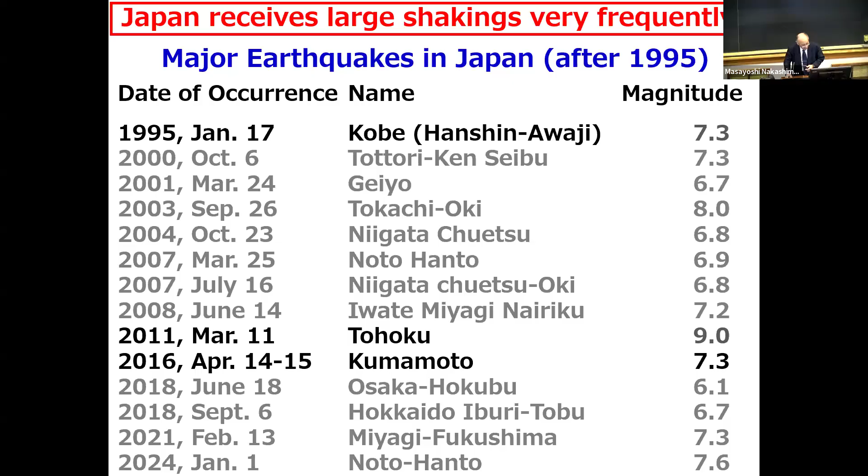One is this, 30 years ago, the 1995 Kobe earthquake, numerous structural damage we saw here. And then in 2011, 15 years later, the Tohoku earthquake occurred, and that experience invoked societal resilience as we found it not possible to protect society 100% once the big one comes.

See here, the washed away towns and villages. Unfortunately, this happened. So this way, we keep receiving earthquakes in the land of Japan. One big effort is to characterize earthquake occurrences and strong motions—in other words, how big ones come, where, and so forth.

But to this end, the country of Japan is deployed with thousands of sensors to measure the ground, and sometimes underground, and sometimes even the seabeds. Anyway, a few thousand sensors just being monitored, so forth. This is on the earthquake demand side.

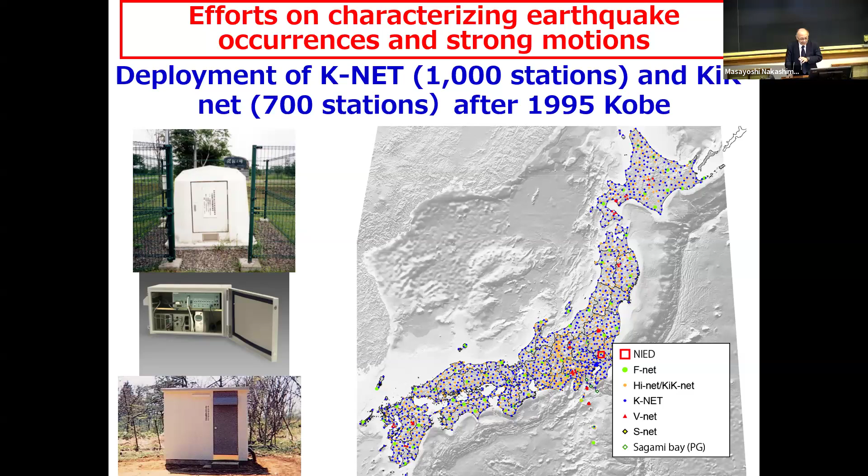On the earthquake resistance, the structure side, this is a generic strength versus vertical axis deformation relationship. So in other words, in the beginning—

No pointer, unfortunately. Okay, now here's a pointer, really small, but that's okay.

Well, anyway, all structural and civil engineers know that. First, everything is fine. But then gradually yielding begins, still all right, but somewhere damage begins, and more damage, and then to the collapse.

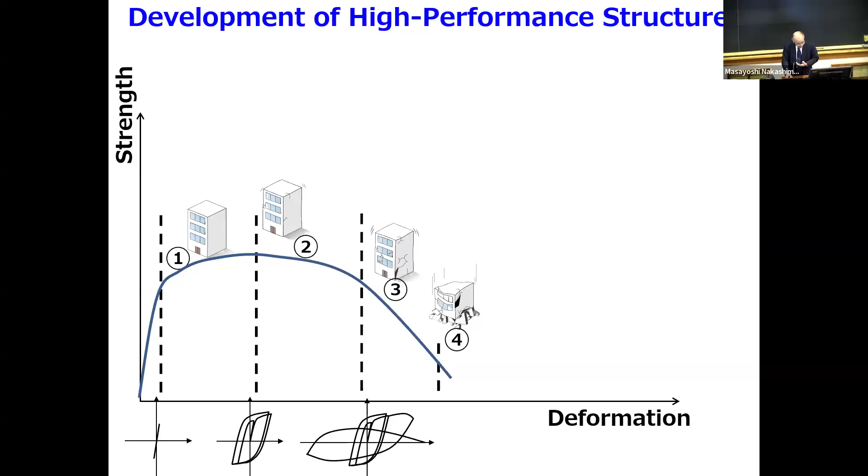That's a life, right? Then I think our effort is to increase the strength, make our structure stronger and more ductile. And there are many ways to achieve that.

For new construction, let's use new materials, or new or hybrid structures, or passive and active controls, or base isolation—those technologies to enhance the seismic capacity of our buildings.

And for existing structures, the advanced diagnosis methods for seismic capacity and according retrofits and so forth. Anyway, the efforts continue to raise the strength and the ductility and so forth. So that's Japan, and we can't escape this.

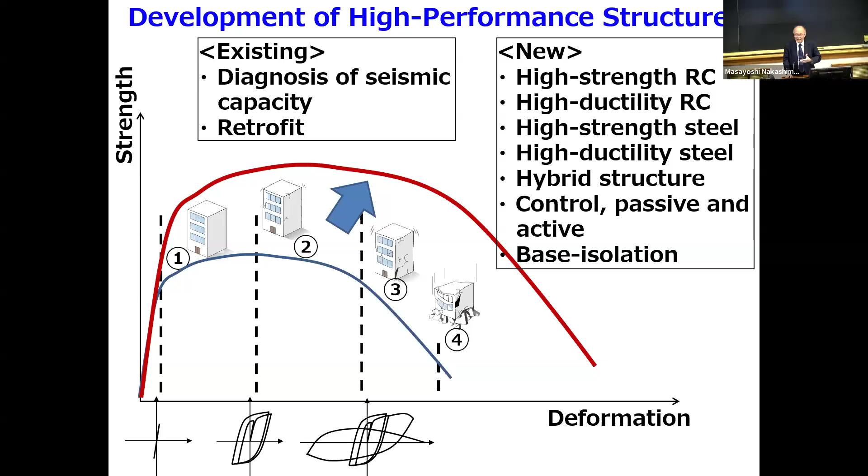And now here is a little bit about myself. Professor Ricles already gave enough introduction, so I can almost skip this.

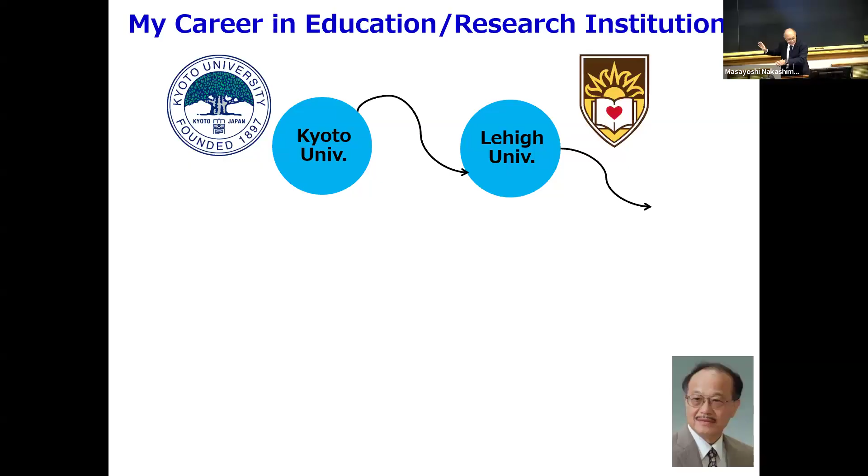First, I graduated from Kyoto University and came to Lehigh, happy four years, then returning to Japan, I joined the national research institution called the BRI, Building Research Institute, moved to Kobe University and Kyoto University, and time by time I worked for the Cabinet Office of Japan to lead some national research.

But sometimes, as indicated by Professor Ricles, I worked for E-Defense, a big jumbo shake table, whose details I'll talk to you about in a moment. But anyway—

Pictures of three gentlemen. Minoru Wakabayashi, my mentor in Kyoto, was a visiting scholar at Lehigh in 1955, long before you were born. But anyway, the person in the middle is Professor Bruno Thürlimann.

He was professor at ETH Zurich for many years. He was also at Lehigh, right? Professor there one time. And the last one on the right is Professor Le-Wu Lu.

He was professor of this university until 2015 or so. Those three gentlemen were friends, and their friendships somehow brought me to this happy place of Bethlehem, Pennsylvania.

Well, in the interest of time, I'll skip the details, but there are funny stories somewhere. Anyway, thanks to those gentlemen, I was able to come and enjoy myself when I was in my 20s. Back to this, the issue of today.

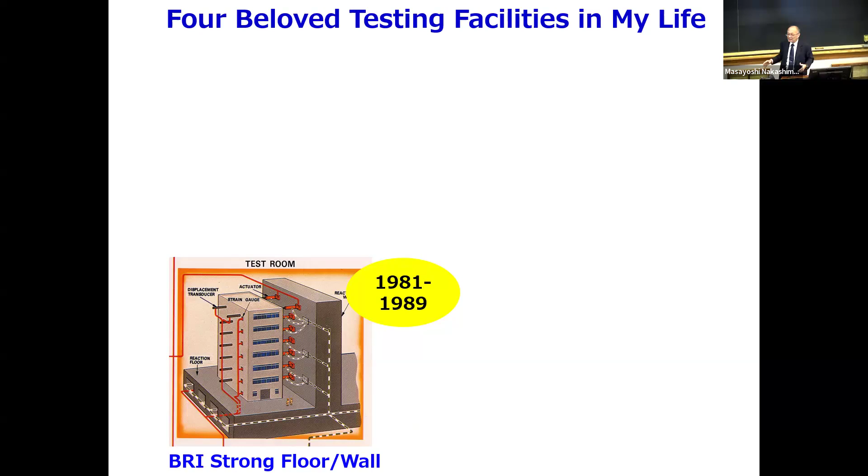I had a happy time there, but then 10 years later I moved to Kyoto University, where I worked for the management and operation of a medium to small size reaction wall, much shorter and also narrower.

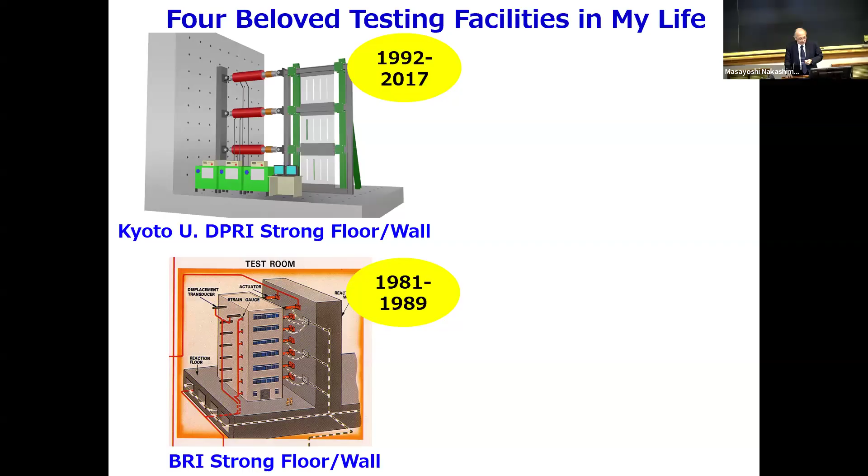But anyway, so I joined Kyoto University and was engaged in experimental work using small size loading systems. A few years later, in conjunction with post-Kobe research, my university got some funding to develop a medium-sized shaking table.

And then at that time, the Kobe earthquake caused much damage, and one reason was the large velocity involved.

So therefore, the post-Kobe research facility development naturally needed to produce that large velocity. But anyway, I got engaged in dynamic testing at small size.

And then about 10 years later, I was asked to join E-Defense to found and operate this big jumbo facility—again, dynamic testing. So those are the four labs I spent my life in as a professional.

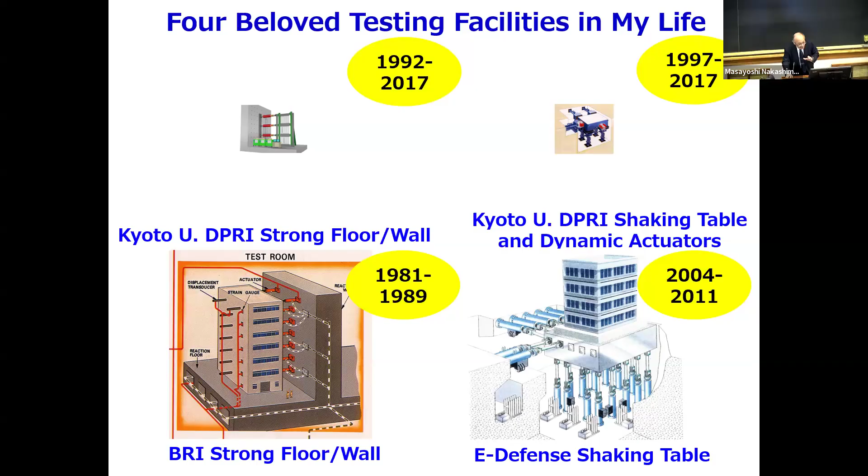However, these pictures are a little misleading because the reality must be like this—much smaller. So then it's small, big, big. Okay, and further, this picture gives us an interesting classification. First, those two are small.

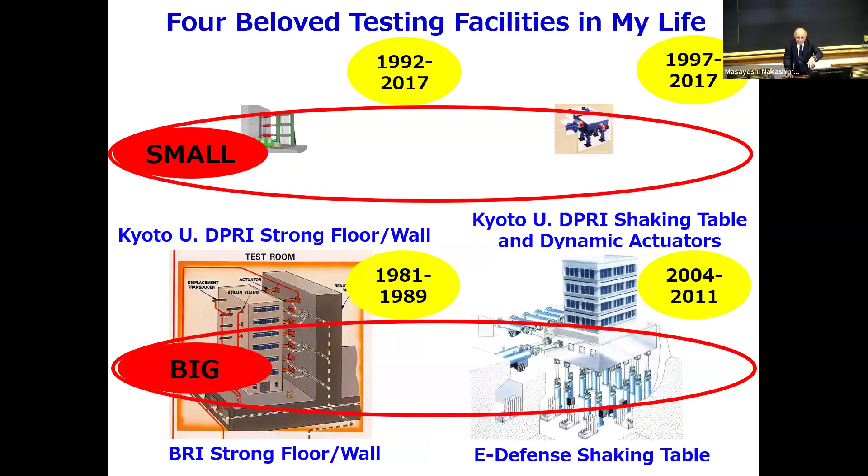Those two, big size. Now, not only that, look at the vertical axis, slow. Actuation means applying the loads and so forth, slow, versus this one, real time, bam, bam, bam, fast. So here it's an interesting combination of slow versus fast, small versus big, a total of 4 combinations, right?

I was involved in all of those 4, and I got some special experience with those 4 facilities. That experience of mine is something that is a story that I would like to share with you today. So far, big versus small and fast versus slow. Small versus fast. Now let's go with the big one, slow.

This is a jumbo testing facility at Building Research Institute. One thing I want to emphasize is that this was not built yesterday. 1980 means 45 years ago. 25 high reaction wall and 25 by 20, well, number not important, big anyway. So then floors, and then the test bed can accommodate 6, 7, 8 stories of buildings, real scale, and then many actuators attached and push and pull, and then see how they behave and so forth.

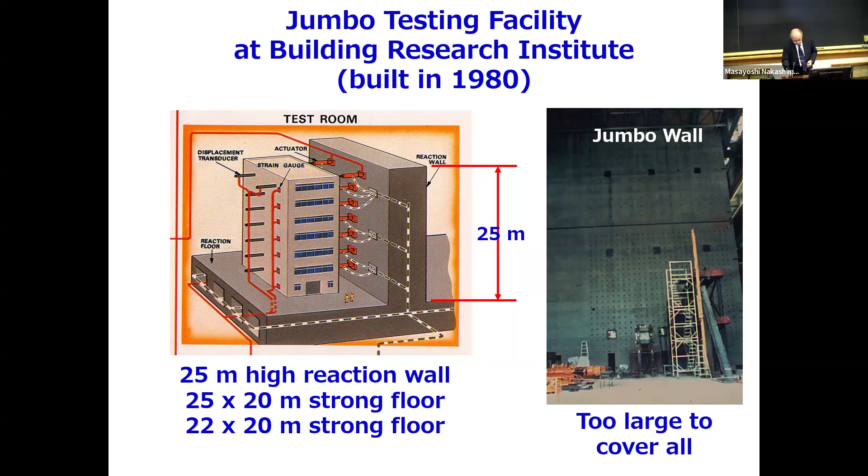Now this is a loading and measuring system. Too small in characters, but anyway, many wiring permanent to connect the sensors to the loading, to the data processing system, hydraulic power here, and then servo control, and also the computers to control servo control and the measuring and so forth. And then this is the system made available 45 years ago.

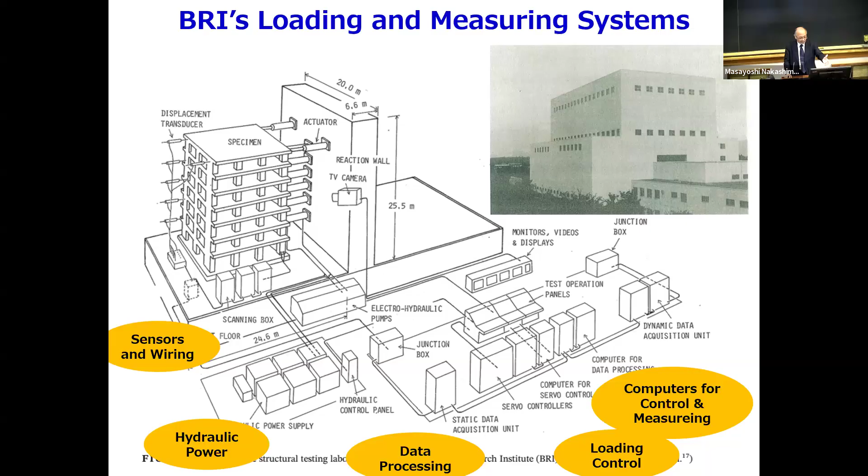And I worked as the most junior member of this. And then we're trying to incorporate the then relatively new technique called pseudo-dynamic test, or also known as online computer control method, now called hybrid simulation. We were trying to deploy the method of hybrid simulation into this big system.

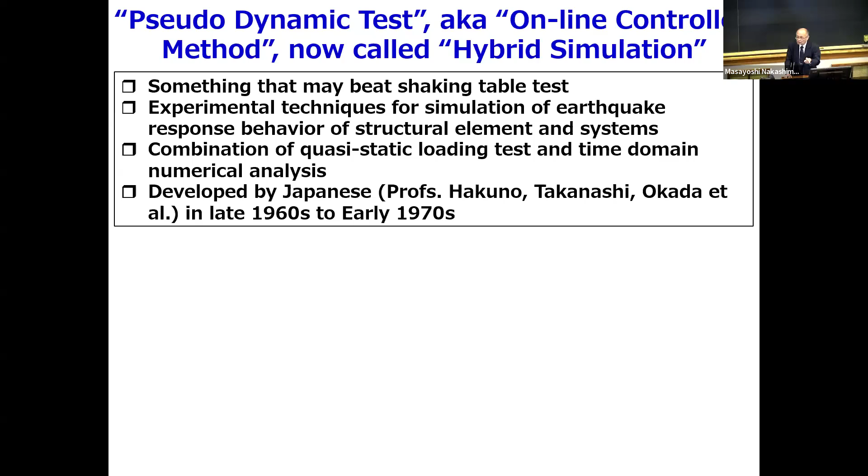And what is hybrid simulation? This is something that may beat shake table tests. It's an experimental technique for simulation of earthquake response behavior of structures, elements, and systems, or a combination of quasi-static loading tests and time domain numerical analysis. Interestingly, the method was developed by a group of Japanese over here, with the initial development in the late 1960s and early 70s. And this is a picture of the hybrid simulation.

I know that many of you, particularly those working for ATLSS Center, are very familiar with this, and know better than I know. But nevertheless, let me briefly explain what it is using my old language. Suppose we have a three-story building whose response under earthquake we want to know. If it is an elastic system, that's easy—there are simple numerical or analytic solutions available.

But if it exhibits strong nonlinear behavior beyond yielding, like this, then it is rather difficult to model such hysteretic behavior. So the idea was, let the test attached to the equations of motion solve the hysteretic behavior. How? We set up the basic equations of motion to represent this system, then use direct integration with respect to time. Suppose we are at step n, we predict the displacement for the next step, apply the displacement to that target, and when we attain that displacement, we measure the reaction forces F.

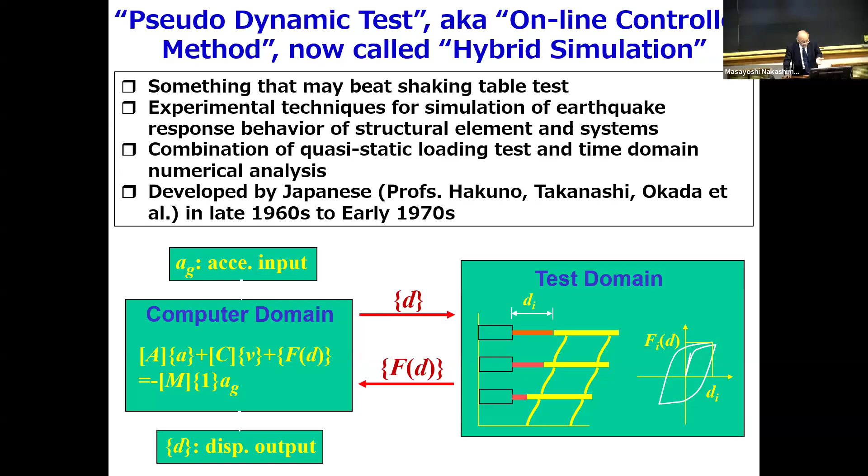This was one of the actuators that can produce 1 meter of stroke, plus minus, with high resolution digital displacement transducers, and then many sensors to measure local behavior and so forth.

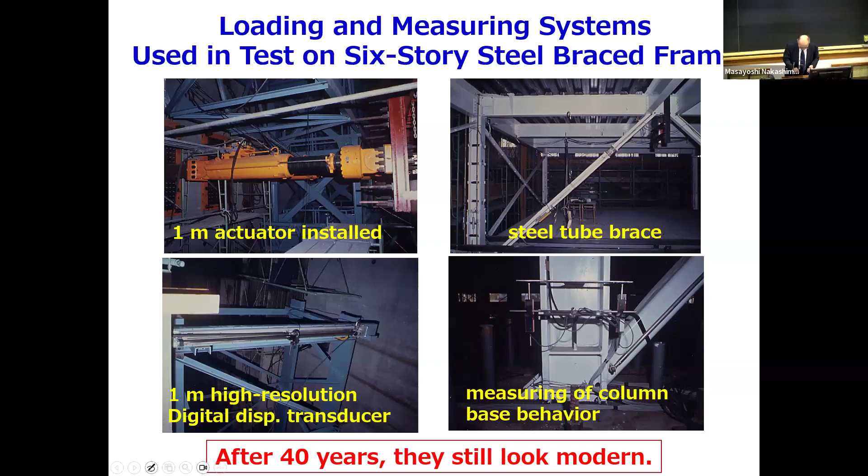As I said at the bottom, after 40 years, they still look sort of modern, so not so bad. But that's something that I was engaged in.

One notable thing is it took 5 working days instead of 10 seconds. Why? Because intentionally the speed was slowed down. More important, when we reached a certain displacement at the peak, we stopped, paused the loading, held the displacement, and then the engineers went into the specimen to check damage and so forth. So it takes an awfully long time. In the end, in order to simulate the 10 seconds of ground motion, it took 5 days, but never mind, 5 days is short enough. But this is the system that I worked on many years ago, and again, it's a big but slow loading system.

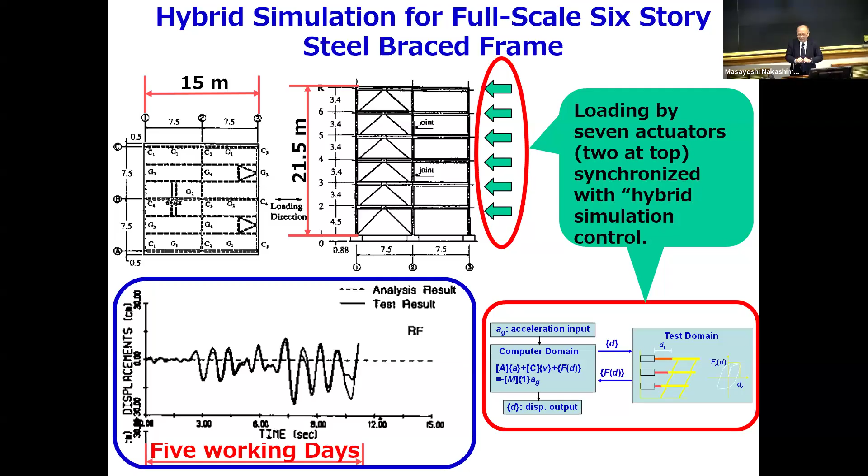Next, 10 years later, I moved from this big institution to a university, and I was able to get this system, already old, but instead of 25 meters, now 5 meters, and instead of 20 by 15. Long enough, but still. The laboratory was not equipped with servo actuators or computer-controlled actuators, none available. So no way to do hybrid simulation, but that's not true.

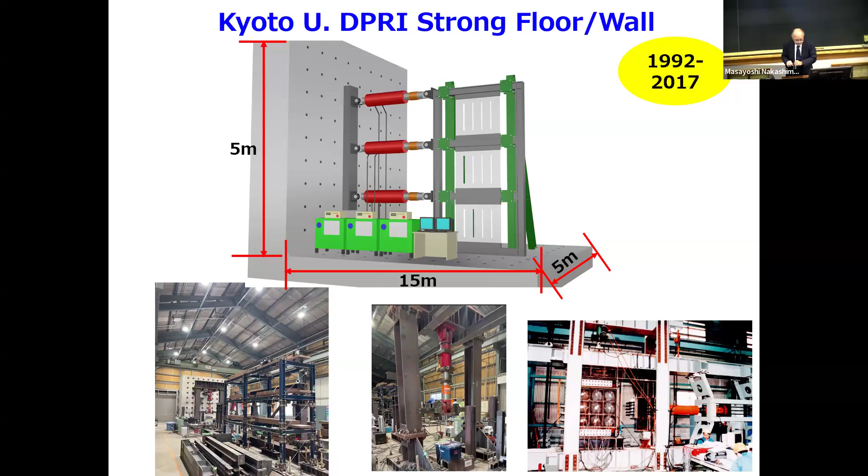Necessity is the mother of invention. Using the most conventional devices, almost available anywhere in the structural lab, we were able to do hybrid simulation.

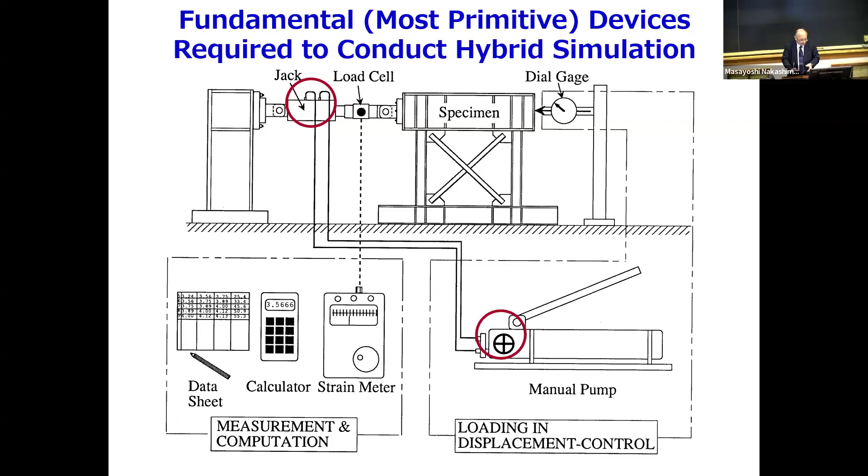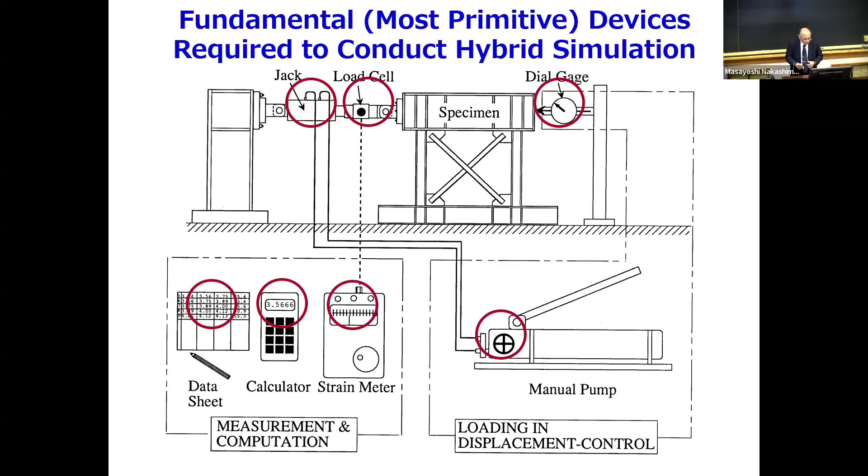In which way? Like this. First we use a very conventional jack, probably everyone knows it, using manual pumps, push and pull. Then a load cell with strain meters to measure the reaction forces. And a dial gauge, measured by human eyes, then a data sheet and calculator, and of course a pencil needed. This is before PCs, once again. So these are the right components we needed to do the most primitive hybrid simulation.

Now, extending this, I made up a story of Jack and Meg. The story is as follows: how using such primitive devices we can do hybrid simulation.

First, two persons, Meg and Jack. Meg is in charge of measuring and calculation, and Jack is in charge of applying forces. First, Meg tells Jack so-and-so centimeters for the next step. Then Jack starts pumping, monitoring the dial gauge to see how it moves and to get to the right displacement. Jack stops pumping and yells to Meg to measure. Then Meg reads the signal, writes it down on the sheet, and hits the buttons of the calculator to solve the equations of motion. By repeating this, we are able to do hybrid simulation.

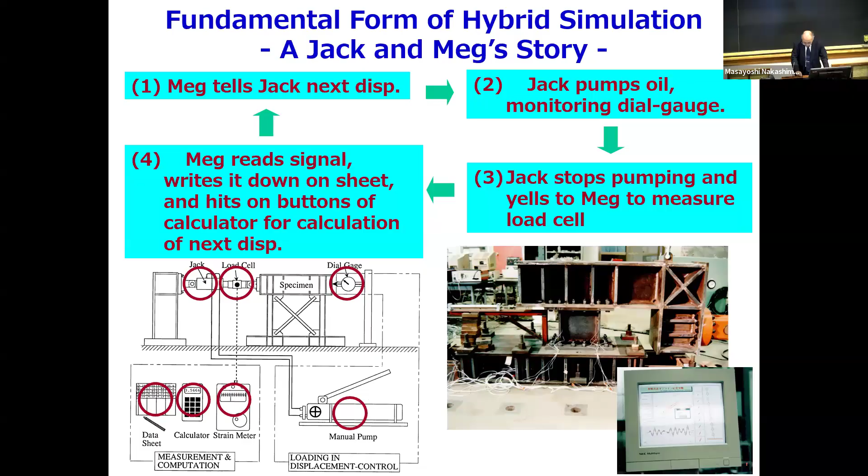Of course, not real time, but this way. Now, some of you may be skeptical about it, but that's real, it was not a joke. We wrote a journal paper in which Jack and Meg's story was presented explicitly. It was published in Earthquake Engineering and Structural Dynamics, a pretty high impact factor journal. And this was not yesterday, it was in 1995, 30 years ago.

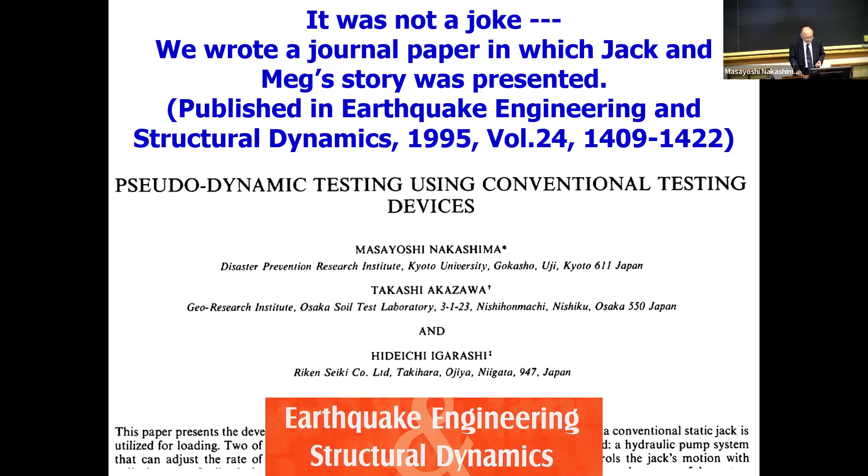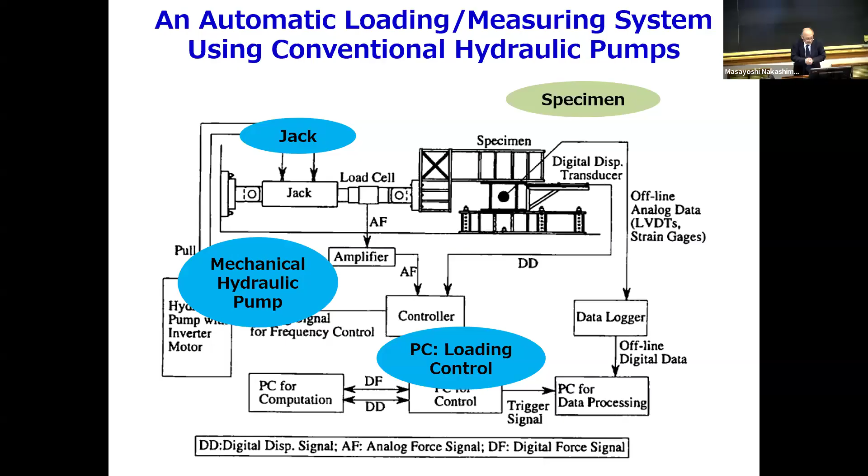So this is what we did. And of course, the complete manual operation was replaced by some sort of automation using 1990s technologies, such as instead of a manual pump, using a mechanical hydraulic pump controlled by PC, and measurement similarly using a data logger or PCs to store the data, and introducing another computer to solve the equations of motion. So, inheriting the spirit of manual operation, we did it.

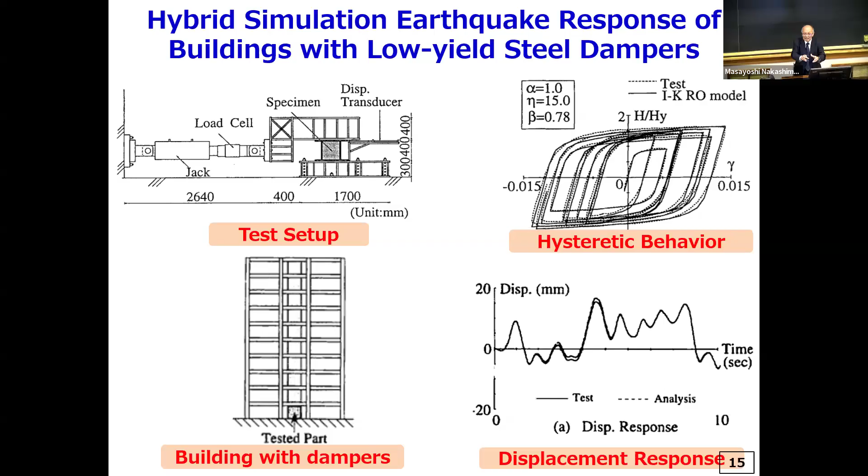Using this, we tried to simulate the earthquake response behavior of a 10-story structure with hysteretic dampers embedded. Those show some of the scenes, and the right bottom shows the displacement history and so forth. We came up with beautiful results. Of course, in essence, there are many dark sides of the story, many millions of mistakes and others, but today I only show the bright side. Anyway, this way it's possible to do hybrid simulation testing without an electronic sub-actuator system. That was what I did when I switched from a big one to a small one.

Then it came to the shake table. Our university got some funding to develop a 3 by 5 meter 3D shake table, characterized by 1.5 meters per second velocity, a big, medium-sized shake table. At the same time, we also got dynamic actuators capable of applying relatively large velocities.

You remember after Kobe, there was big damage. I think the large velocity was considered to be the source that really aggravated that degree of damage in Kobe. But anyway, now from slow to fast.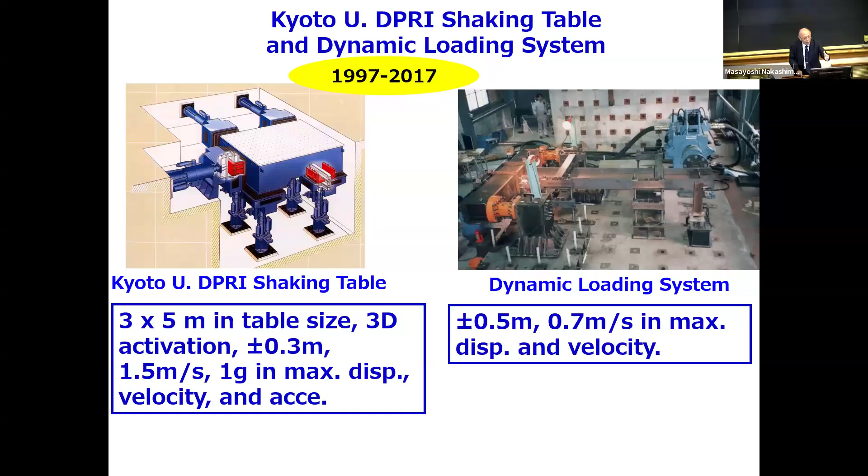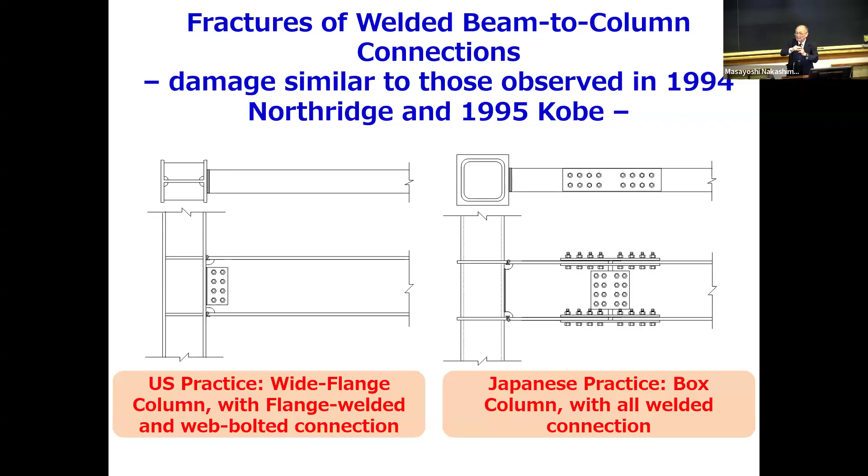That was the time of 1994 Northridge, 1995 Kobe. In both earthquakes, old timers know we found many beam to column connection failures, bad, particularly in bottom flanges. So some of the pictures upstairs are from Kobe, showing bottom flange brittle failure and separation. The bottom line, the lowest bottom floors, shows the damage from 1994 Northridge.

But anyway, at that time, one argument was that the so-called rate of loading effect might have been a cause of such failure. What is the rate of loading?

Commonly, to quantify beam to column connection performance, we apply forces slow, slow, slow. But the reality is bam, bam, bam. In a material coupon test, when we load slow, we get a stress-strain relationship somewhere here, but with the same specimen, when we load fast, yield force strength tends to go up, but the ductility goes down.

So then somehow showing the brittle behavior, that might be the cause of many fractures after Kobe or Northridge. So to quantify this, or to verify if this is true or not, we used this newly acquired actuator, making two identical specimens, same configuration.

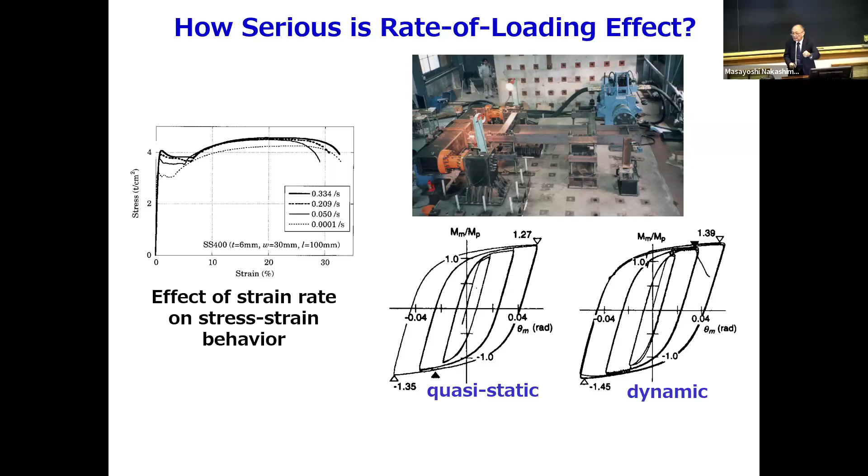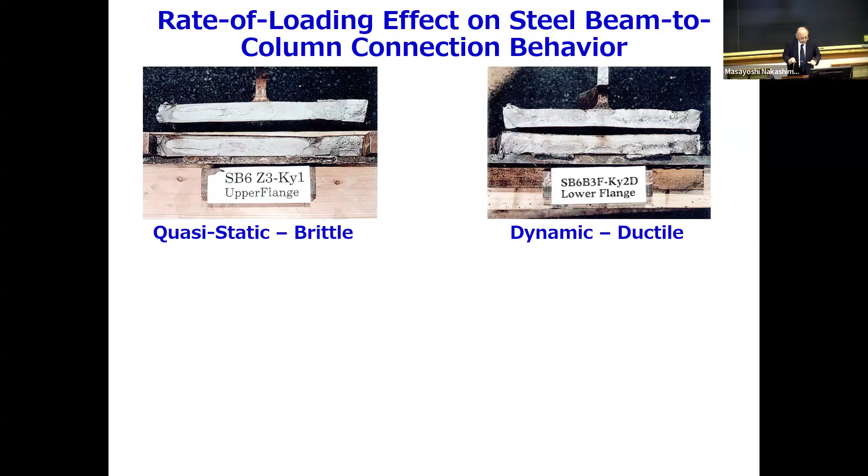That was contrary to the earlier belief that the strain rate effect may reduce ductility. Why did this happen? When we looked at the fracture surface, the quasi-static one showed some brittle fracture, a portion of the fracture surface was brittle. Otherwise, the dynamic one was very smooth, all ductile fracture. Why did this happen? That was the temperature.

In dynamic loading, bam, bam, bam, hysteretic energy is dissipated, but where does that dissipated energy go? It has to go somewhere, right? It was transformed into heat energy. This means that the temperature in the vicinity of the yielded zone continues to rise, to the point it becomes impossible to touch by the end.

But it's the same displacement history. If we apply the load so slowly, then I think the heat energy evaporates into the atmosphere. So the dynamic loading test revealed that the earlier speculation, that faster speed means more brittle behavior, was wrong. But at least we had a nice time discovering something different from common sense.

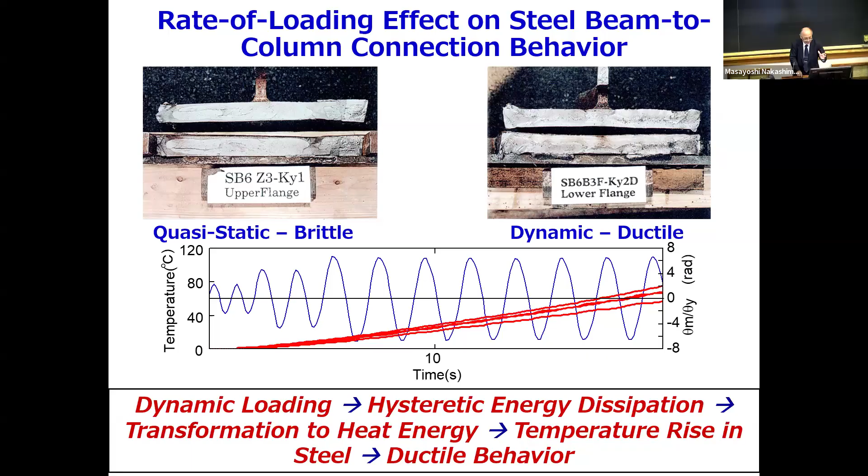But anyway, this is the dynamic test, still some sort of small lab. The last one is the E-defense shake table. For all strange reasons, I was asked to join as director of this facility while maintaining my professorship in Kyoto University.

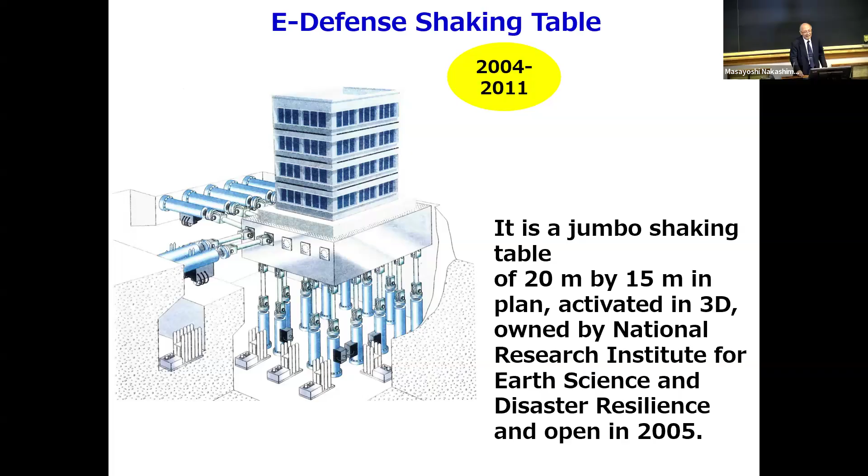By the way, the E-defense shake table is a jumbo shake table, 20 meters by 15 meters, activated fully in 3D, owned by a National Research Institute. This is the configuration: a big shake table, a 700 metric ton chunk of mass supported by 14 vertical actuators and 5 horizontal actuators in one direction and another 5 in the other direction, all under synchronized control to produce big motions on top of the table.

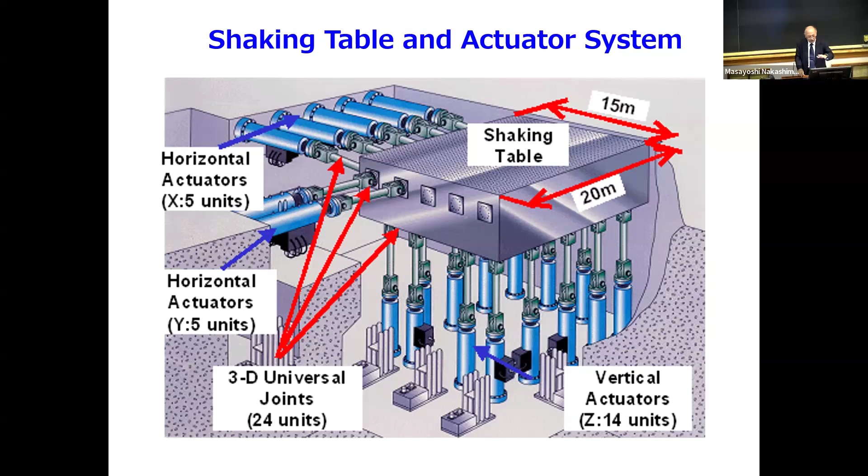This shows the specifications, but forget about those small numbers. The essence is it's 20 by 15, big. The payload means that 1,200 metric tons of mass could be installed on top of the table. And the most notable feature was that the maximum velocity was 2 meters per second. Again, at that time, we were so obsessed with speed and velocity. But anyway, this is the E-defense shake table.

This was inaugurated in 2005, and since then, over 100 full-scale or large-scale tests have been conducted on various structures: 4-story base isolation, 6-story reinforced concrete, 2-story wood, 4-story steel frame, 6-story wood houses, and pile foundations, and so forth. So pretty busy after the inauguration.

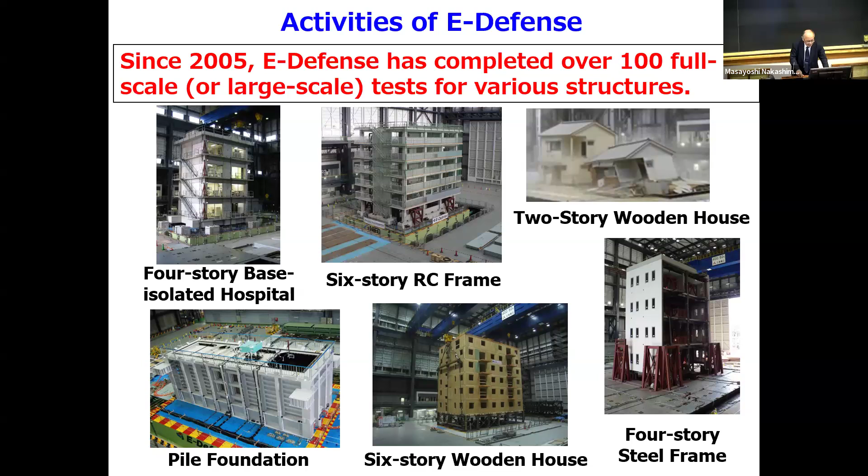So then I'll show you just one video here. If the video works, the chance is less than 20%, considering the trouble we have encountered thus far. But nonetheless, I am right, I think it doesn't work.

Can you help? You just push the button. I got you, I got you. I see, here, in case of some... okay, 4-story building.

Don't worry, it's coming from another app. See, 2 span, 2 bay, 2 span, and this first, second, third. The objective of this test is to reproduce collapse. All the same motion from different angles.

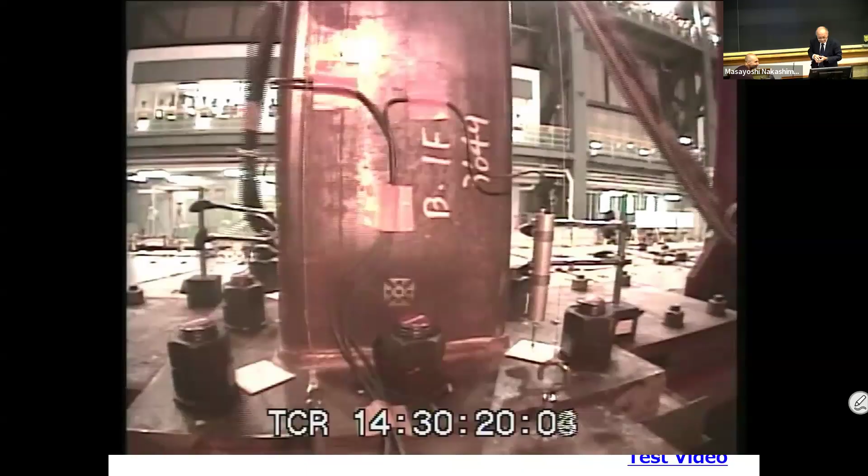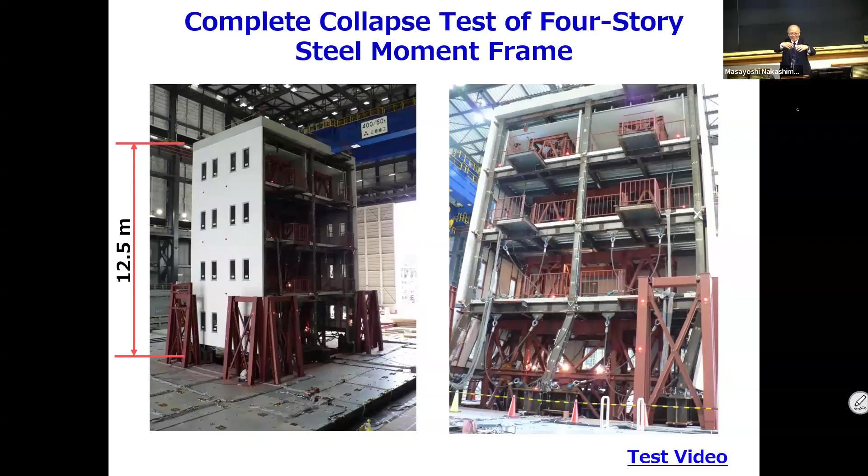Okay, returning to the PowerPoint. The objective was to reproduce the complete collapse. We were really worried, but in the end it became a success. This is one of them, and it made a very loud sound. I could repeat it without sound, but then there's no interest. Sound has a really positive impact—please remember this. With sound, it's fine; without sound, it's nothing, right?

Anyway, where we are: the final collapse is the first story collapse, a story drift collapse. Of course, we followed our practice of strong column, weak beam. So until the very end, the behavior was very stable, but in the end something bad happened—it kept swaying and so forth.

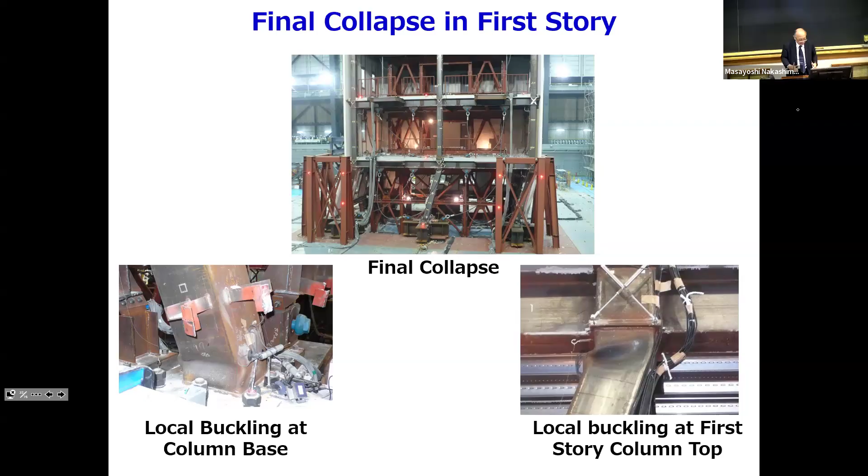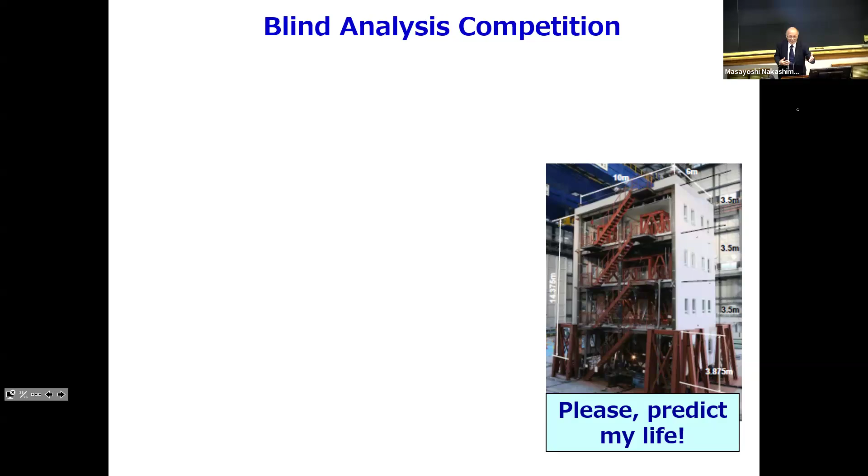One more story: in parallel to this big test, we conducted a blind analysis competition. The idea was: this specimen is ready to be subjected to big ground motion and is going to collapse—please predict when I collapse. That was the question, and the competition was conducted. We found participants from many countries worldwide, applying through a website, and the purpose was to estimate and predict my life as close as possible—how well the simulation can trace the experimental behavior.

We set up 3D and 2D categories for research individuals and engineers. Overall, interestingly, over 100 teams registered, and eventually 47 teams submitted their results—Japan had 17, US had 15, and so forth.

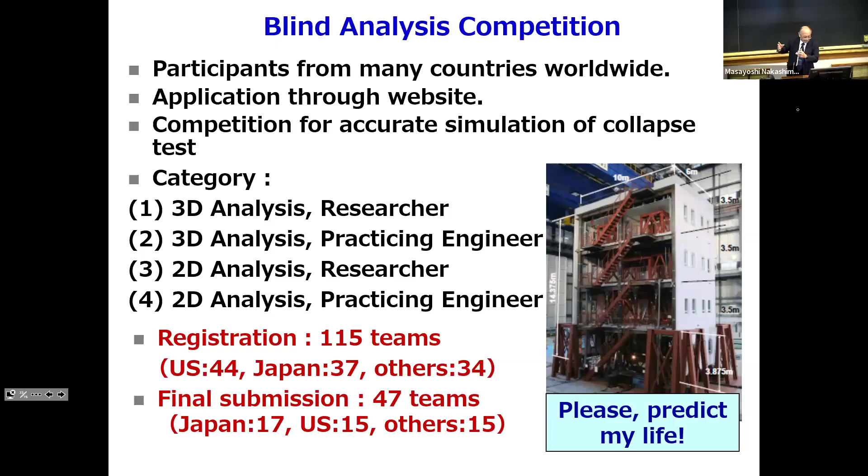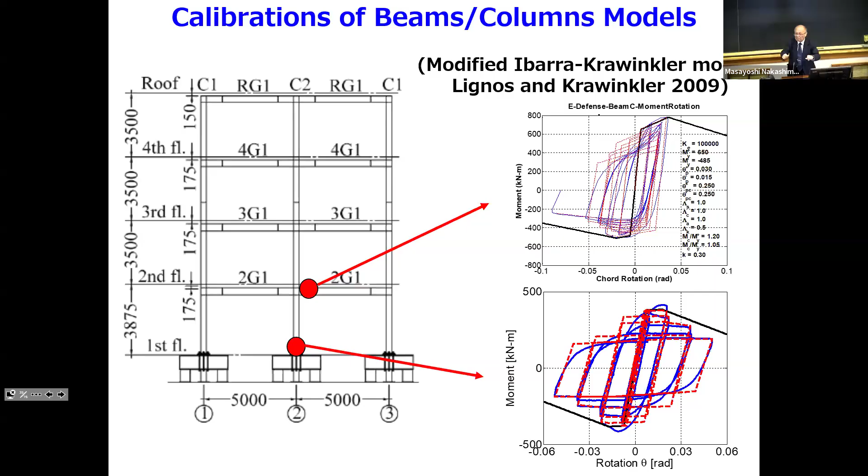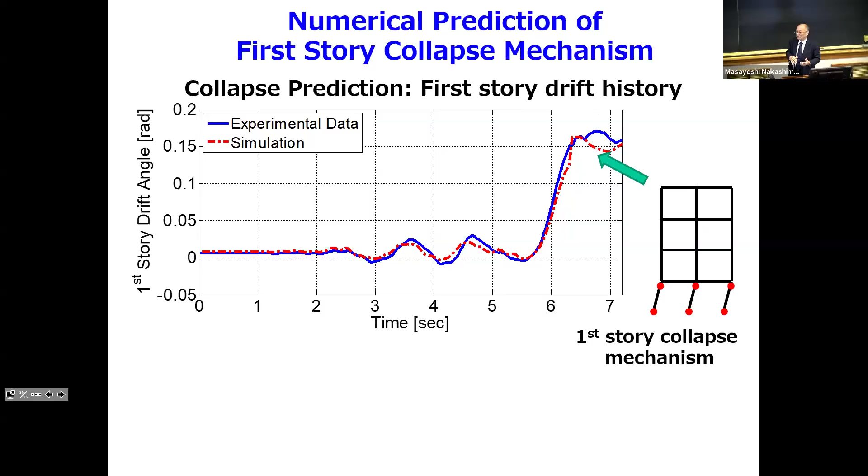A good example is here, and it's pretty good. Later, one of my postdocs did careful tuning of hysteretic models in reference to the experimental results—tuning beam behaviors, tuning column-base behaviors, with all kinds of tuning done. Look: the experimental behavior up to the collapse was completely simulated by numerical simulation. So that shows the greatness of numerical simulation, but with a reservation—it's great only after we discover the actual behavior, particularly when the behavior involves very strong nonlinearity. A little sarcastic, and I'm accused by numerical analysts, but nonetheless this is something we have discovered.

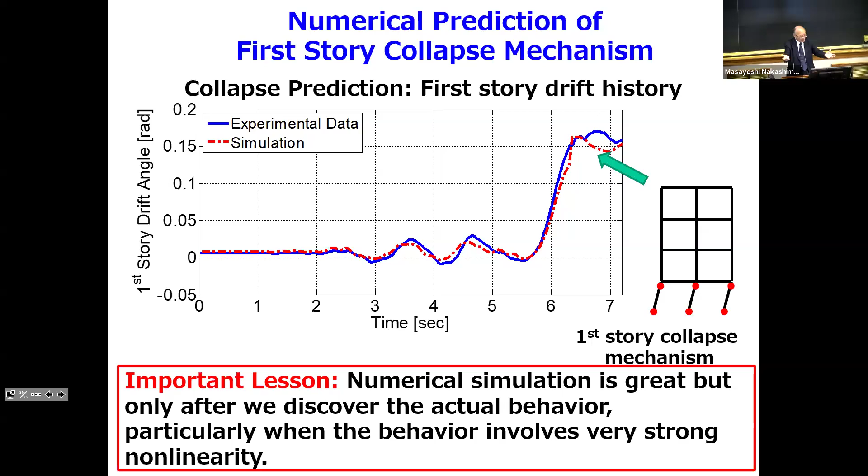Now I have introduced all 4 facilities, you remember? Besides that, together with my students, we did small pieces of study on various aspects of hybrid simulation, like error propagation—sometimes error creates big problems—or hybrid simulation with substructuring techniques, peer-to-peer internet online testing, or simulation with mixed control, and toward the end, real-time hybrid simulation.

One time we tried using 1980s technologies, another time 1990s technology, and so forth, but in the interest of time I'll just skip those—afterward they are not that important. Red shows which lab I used to come up with those developments. In the 1980s, 90s, until probably mid-2000s, very few people engaged in hybrid simulation, so it was easy—we could do anything we wanted without being bothered. But anyway, this is the time.

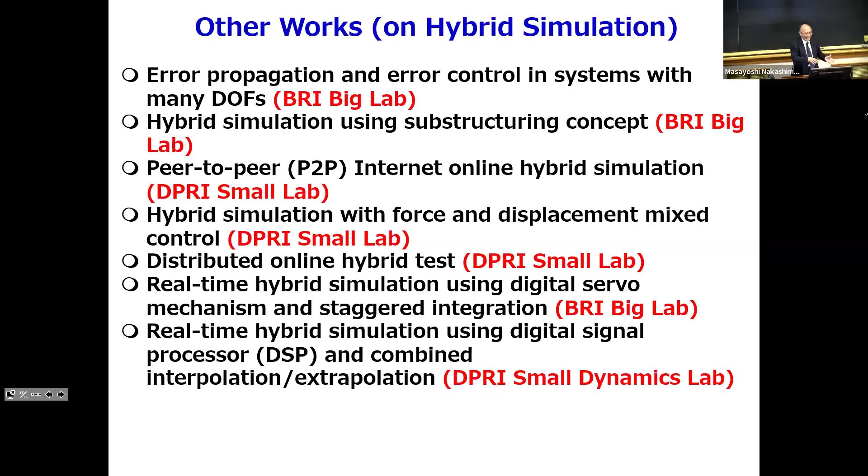Also, there were some developments regarding experimental techniques related to shake table tests, like substructure-based shake table tests or something. But again, they're not that important, so I'll skip them, except for one example.

Now, there was much concern about the performance and damage of high-rise buildings subjected to long period and long duration ground motions. What is that? Japan is on the Pacific, so the big ocean ridge called the Nankai Trough periodically causes earthquakes.

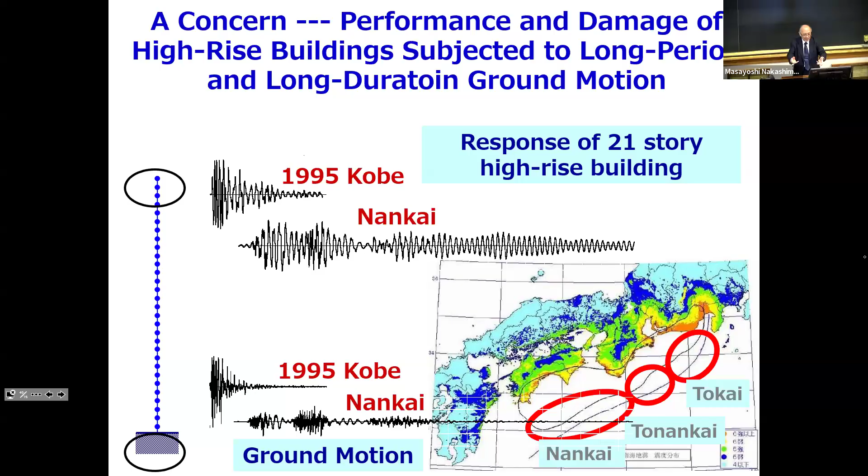When those ground motions reach big cities like Tokyo, Osaka and so forth, the high frequency component is dampened out, but not so large in acceleration. The long period motion continues, not for a short time, but for 10 minutes. So then the biggest victims are high-rises, because of resonance amplified particularly at the top, and also for long duration, 10 minutes, many cycles of back and forth loading, so fatigue failures may become a concern. Anyway, long period ground motion was a topic to consider.

Then we decided to try to do it using E-Defense, but 20 stories high means nearly 100 meters, right? Say the largest facility, our ceiling was only 50 meters. If we developed the real scale specimen, it would penetrate into the air, and that's not possible. However, we still wanted to do that.

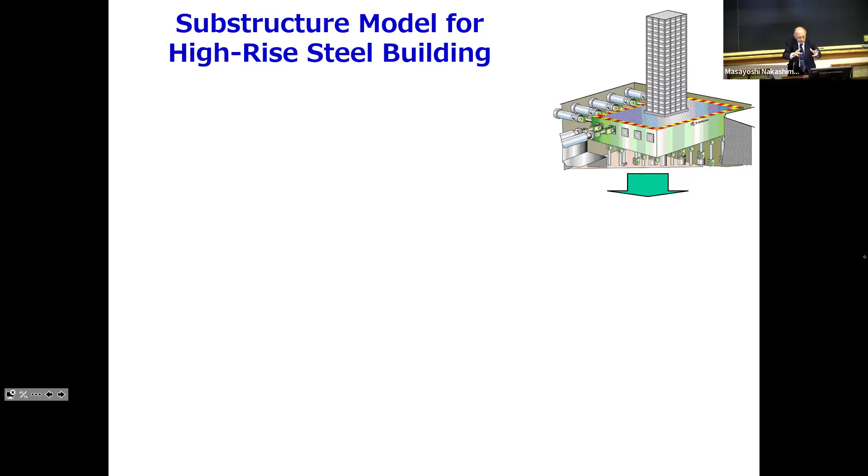We squeezed the upper portions like this. Civil engineers, you understand how we treat it. So the one on the right shows the bottom 4 stories. We reproduce it as it should be, meaning beams, columns, floor slabs, everything, but with the expectation and knowledge that the lowest 4 stories will sustain the largest deformations anyway.

And then the stories above are condensed - a few stories into one, another few into another. So the mass is condensed and represented by reinforced concrete panels or slabs. And for stiffness, say a few stories, the stiffness is adjusted and replaced, represented by rubber bearings with dampers and so on. So damper, rubber bearings, floor slabs, and then we try to reproduce the first mode natural frequency, second mode, third mode, and fourth mode, and so forth, trying to resolve the dynamic characteristics as close as possible to the prototype.

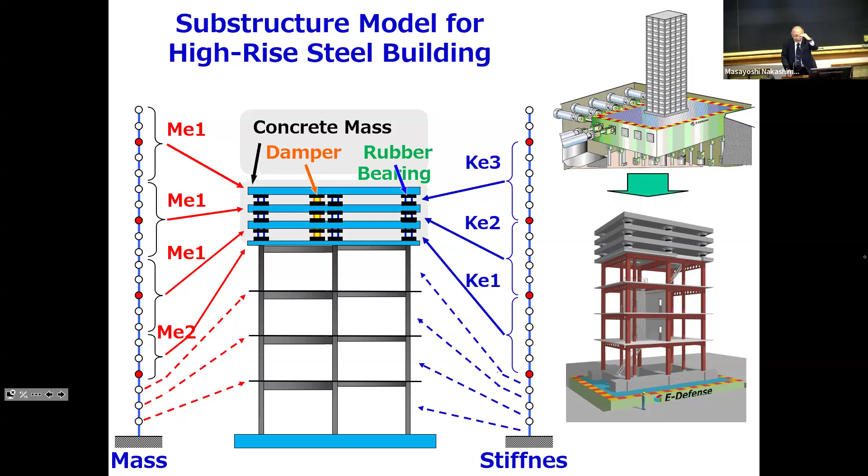This is what we did, in order to save the life of our ceiling. Anyway, the one in the middle is the specimen that we used. It is scary - see, big mass times four on top. And of course they vibrate, meaning the top floors, a big mass moving more than 2 meters back and forth. Ooh, that's something. Not good for the health, particularly for the director, but that's okay.

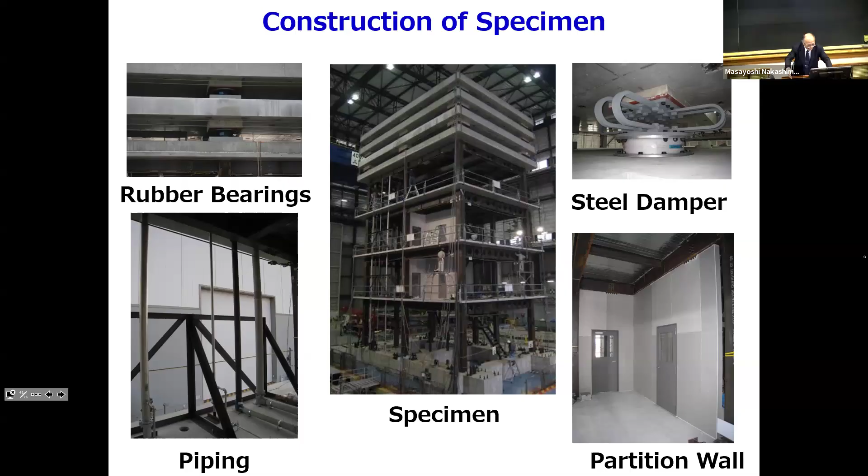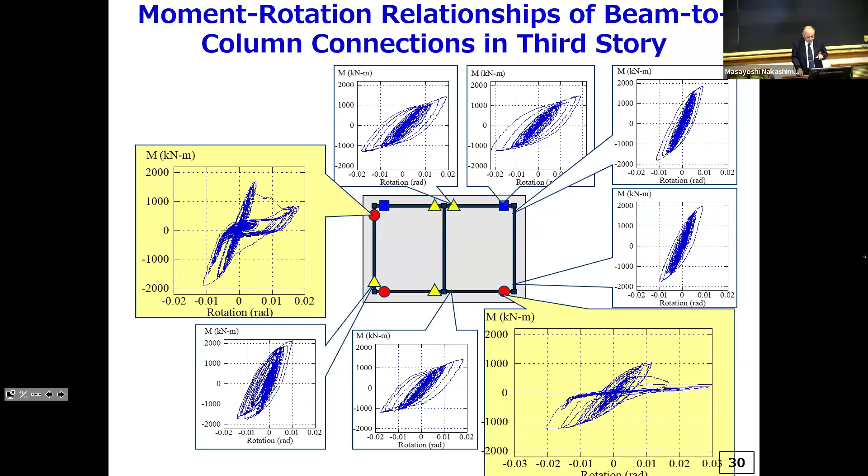So this is one lesson I see. We always encounter a new project whose test demands something beyond the facility's capacities. For instance, if the table is 20 meters by 15 meters, researchers come and say for a specimen, say 16 by 21 meters. And therefore maybe we enlarge the size of the table. Then the next day they'll come with an even larger one. So researchers as individuals are pretty insatiable. But anyway, the size demand is sort of endless.

Now, the final stage of my presentation - size, scale, time and so forth. See how size affects experimental results. Probably many of you know already the difficulties in duplicating details in reduced scale specimens.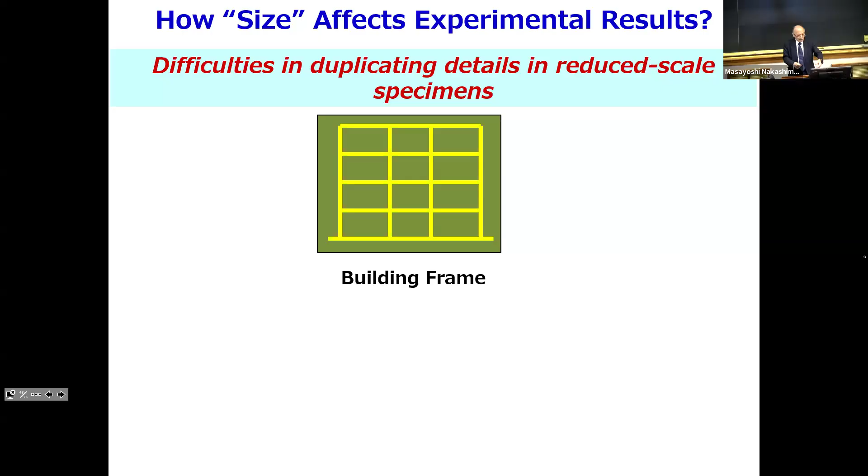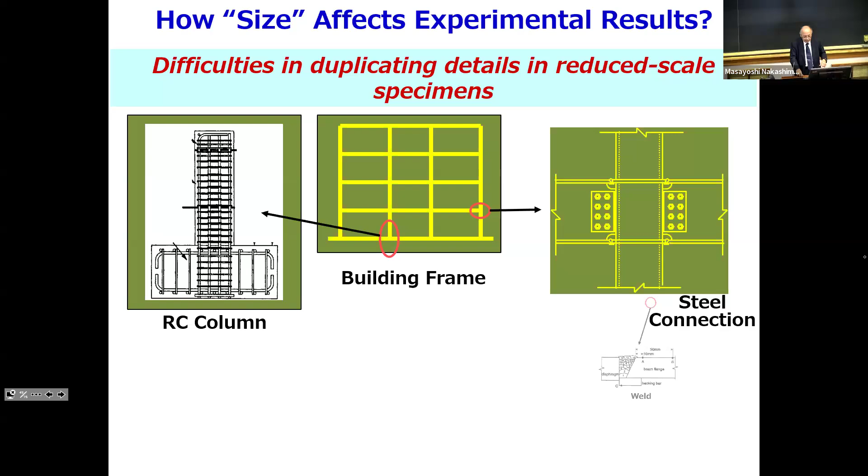Like a building frame in the middle - in numerical analysis, oftentimes beams and columns align and the connections are just a point. But in reality, reinforced concrete is not a point, it's full of reinforcing bars both horizontally and vertically. Or in steel structures, beam to column connections are welded with many layers of welding to connect the column and beam. But now it's easy to say, sorry, we can't scale down those details - it's small enough even in the prototype, how can we further reduce it?

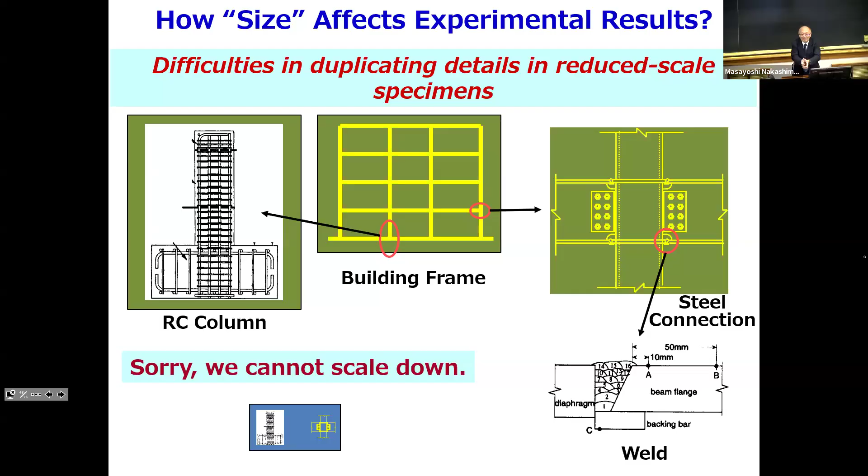Then, one simple example: beam to column connection, bam, bam, bam - see how the connection behaves. The one on the left is full scale, and the one on the right is 1/10 scale. We fabricate the specimen, machine cut carefully.

However, the connection of the beam to the column was impossible to weld because the thickness of the flange was less than 2 millimeters already. So therefore, we cheated the connection by using mechanical joints.

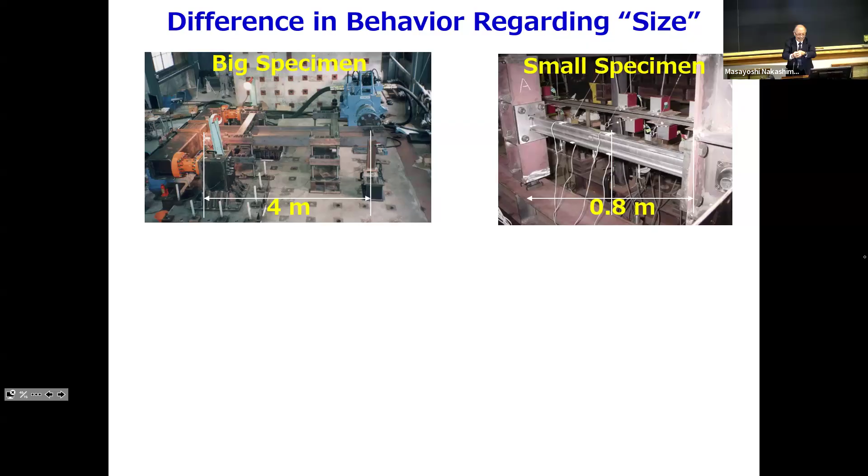Then what happened? In the real scale, the ductile behavior, but somewhere it breaks. It broke, that's it. Otherwise, by cheating the connection with a mechanical joint, the results say the beam to column connection is infinitely ductile. So this tells us the size reduction makes it difficult to duplicate the prototype behavior.

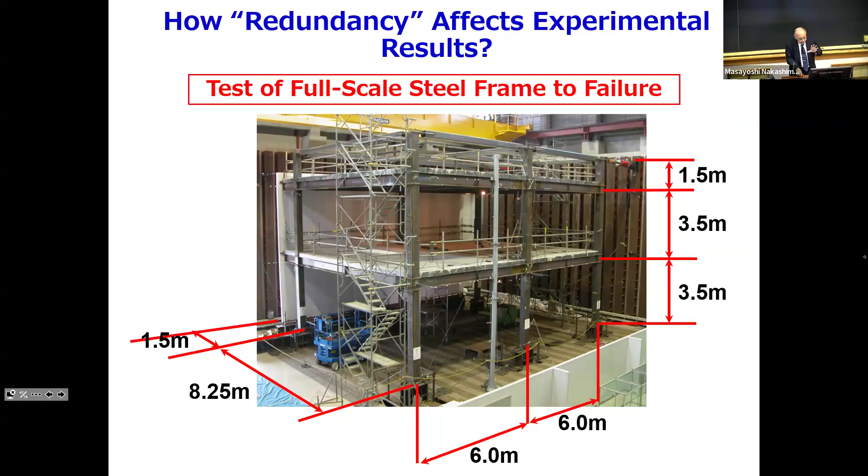And then there's the redundancy issue as well. This is a full scale, 2 by 1 bay, very simple steel moment frame, and we did a static test, push and pull.

One time, the beam to column junction, bang, the one on the left. But if it were an element test, beam to column connection only, bang, that's the end of the test because of separation, that's it.

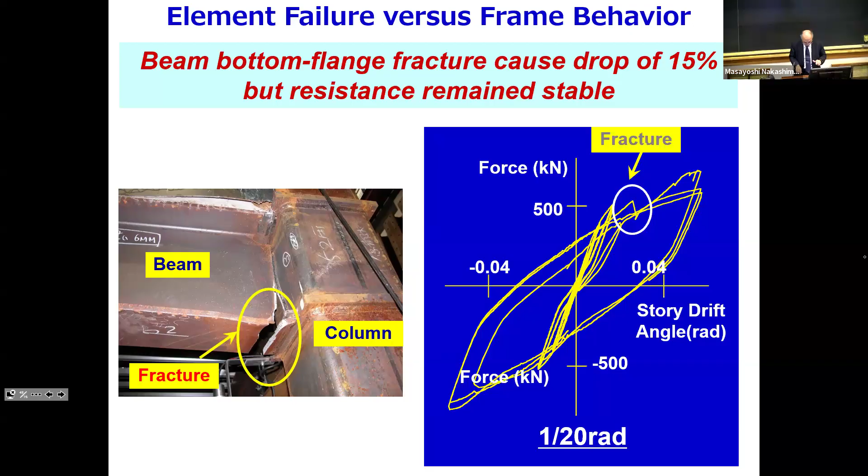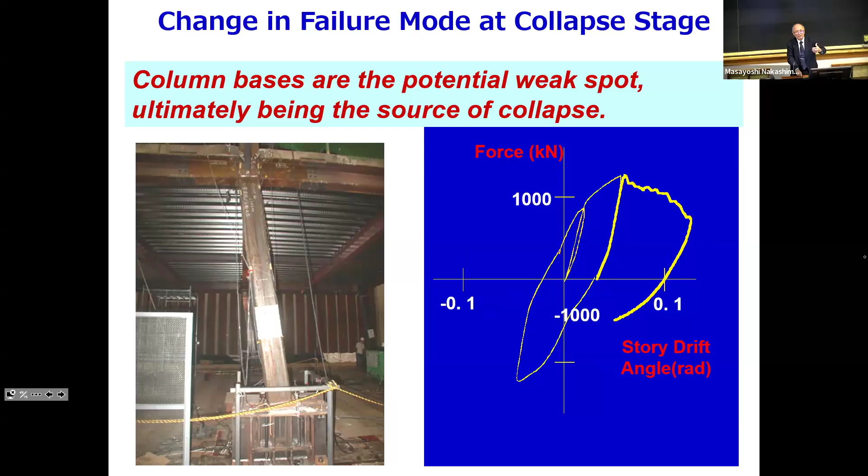So now, the final question: which one of them do you like? Slow, fast, small, big? Which combination do you like best?

To this end, we have to think about element size: beam, full scale versus reduced scale. Reduction in scale is okay. Rate of loading: earlier I said bam, bam, bam, versus intentional slow. Is this important? Or redundancy: one member versus much redundancy.

Type of loading I didn't touch upon, but I think oftentimes the structural tests in earthquake engineering go with small cycles, fixed amplitude, some cycles, increasing the amplitude, some cycles, increasing further, and so forth. So it's a typical cyclic loading test. But the reality is sometimes one big, small, and so forth.

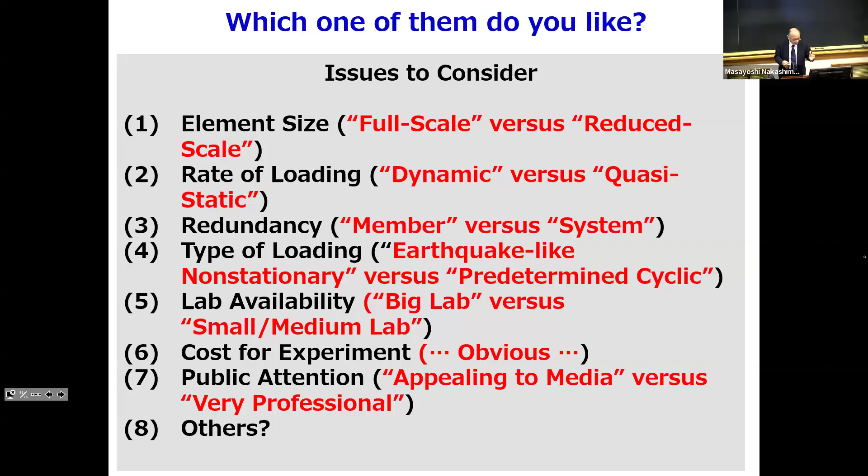Then lab availability: big lab, small lab, cost of experiment, that's obvious, or public attention, appealing to media, or very professional. Important, right, as a test, but nobody understands what they are doing. Some tests are very appealing, like the E-Defense, some tests televised.

So there are many issues to consider, and then at least consider which one you like. One trend I discovered: the earthquake engineering research community has two groups, okay? Basically two groups, and there's a chasm, or a war, between those two groups. Now, which group do you belong to?

Now, what do I mean by groups? One group is supply side people, the other group is demand side people. Demand side means, say in earthquake engineering, the ground motions. We then have forces, inertial forces exerted into the structures, and the structure has to sustain those forces without collapse. So then how much force do we have to consider, and how do they behave?

Some people's main interest is this. So I call them demand people, dynamics and so forth. Otherwise, supply side people mean: suppose this much strength is needed for my structure, how do we design it, how big are the specimens, columns, beams, and connections, and so forth, to make sure the structure is strong enough not to cause any damage. So supply side people are capacity-oriented, versus demand-side people who are response-oriented. Those two groups are different.

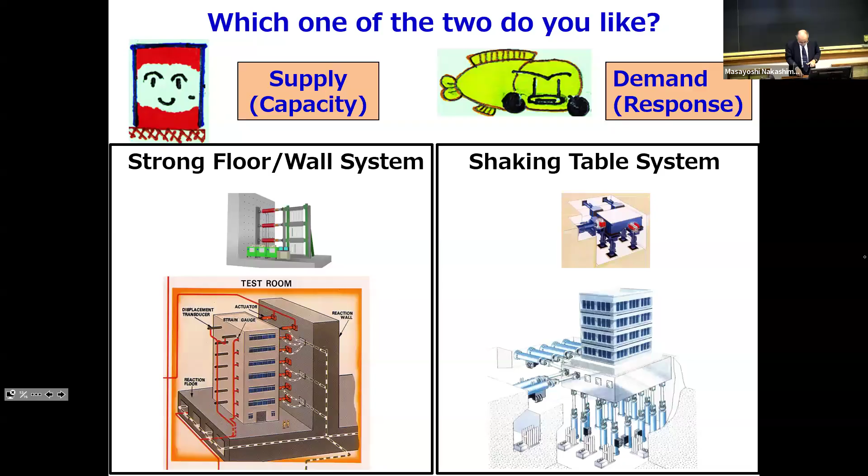What about small versus large? To this end, I did some statistics. As a university professor, I fortunately survived and supervised about 60 PhD students and postdocs, and about 100 graduate and undergraduate students, and I was able to publish probably 200 plus journal papers. I was lucky. But I checked how many papers are produced by each testing facility.

So I took the statistics: big and fast, 27; big and slow, 8; small and fast, 26; small and slow, 86. By far, small and slow is the most productive in terms of number of publications. As a university professor, I see my mission as nurturing the next generation, and I consider research a means to education, to develop students' insight.

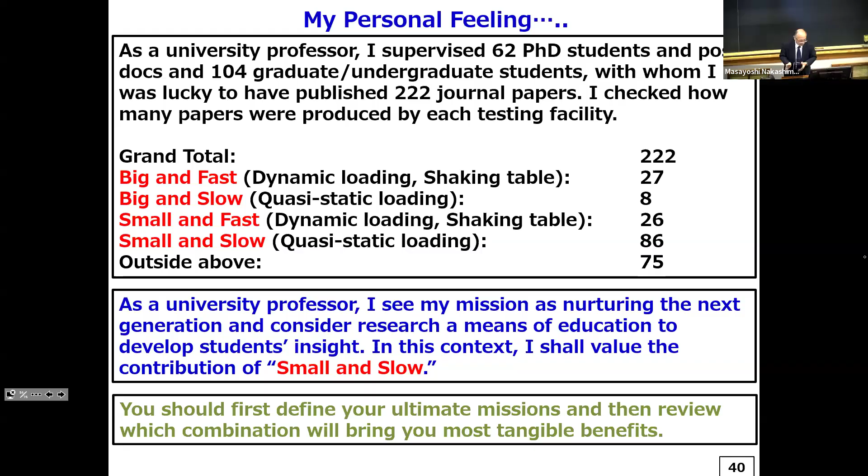In this context, probably I shall value the contribution of small and slow. But this is my subjective view. All individuals engaged in research and education should first define their ultimate missions and then review which combination will bring the most tangible benefits. So I said small and slow, but big and fast is also very important. Occasionally we have to resort to the ultimate solution, which could be big and fast, or big and slow. It depends on individuals' preferences and their respective missions. That's how I see this, slow versus fast, small versus big.